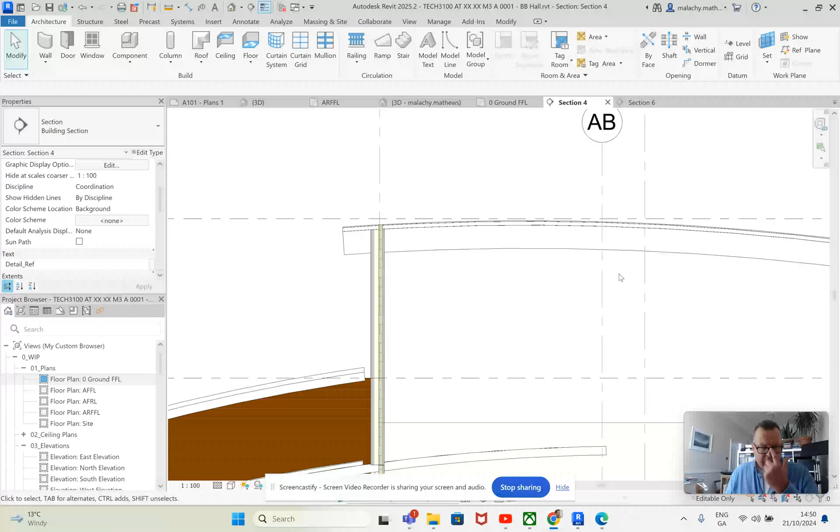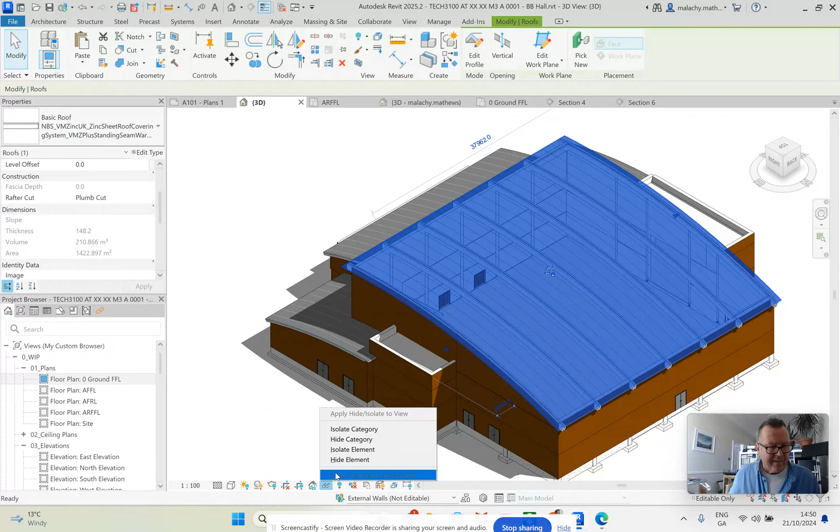Now, one of the things that I have to do with our basketball arena here is get in our secondary support system across here. So they'll be like the Z purlins running across that idea. So I'm going to hide this for starters. Now I get access to that.

I'm going to select the walls here as well, and select all instances in the entire project. I'm going to hide those too. So I just got exposed my structure here. Now this is a little technique I'm going to show you here, and it is a variation on a technique that I picked up from Niall at the 8020 BIM channel, and Jeff at the Revit Kid as well. So a little variation on stuff that I've learned from them.

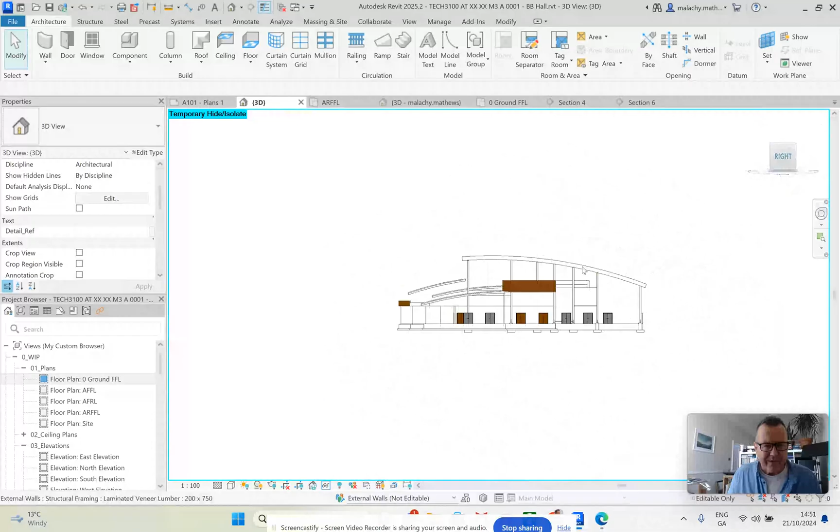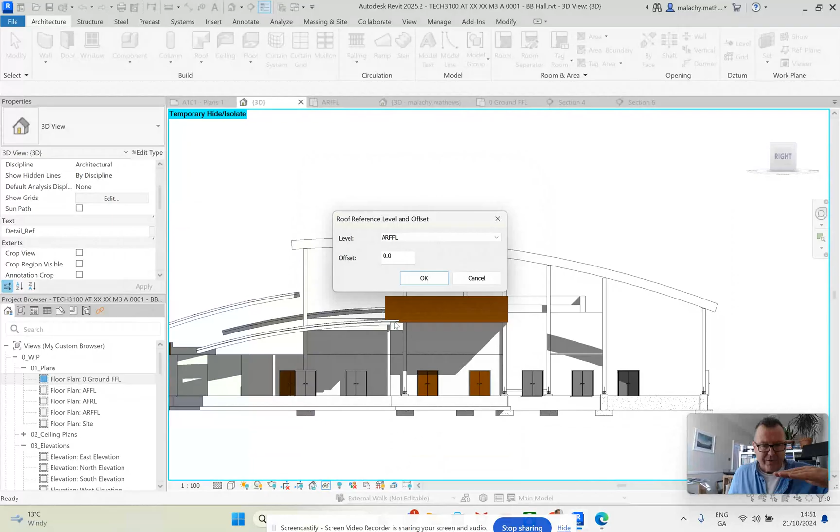So let's go over to here and to the right hand side so I get a vertical view here. Now, in the same way that we created the curved roof, we're going to do a second version of that. So this is going to be roof by extrusion. We still have our reference plane picked there, so we've gone from horizontal to vertical now modeling, and we're going to pick our wall like so. Now here's our roof over here.

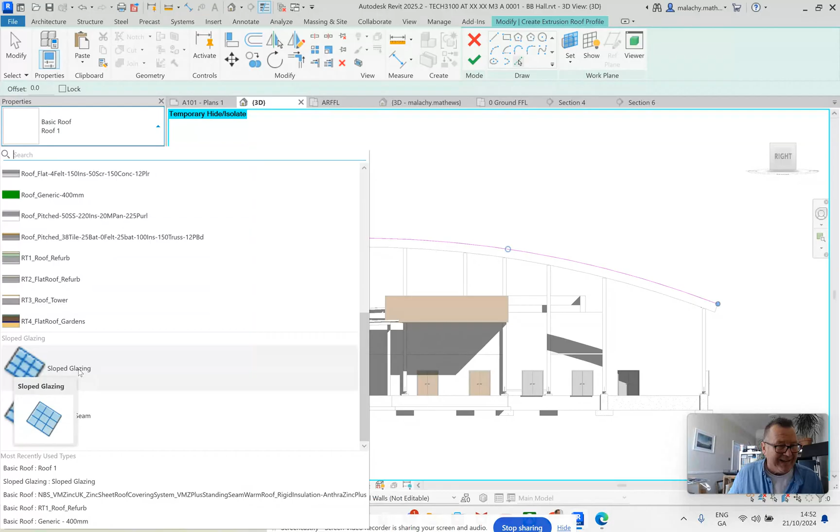So we can pick any of these, but you're going to pick what is called a sloped glazing. All right, so we don't need to pick a roof, we're just going to pick sloped glazing for the moment, and then we're going to go into the properties of this here. So you want to pick empty panel here as well. Okay, so that's an empty panel, and grid 1 is either north-south, or grid 2 is east-west. One of them, you might have to just figure that one out.

What I'm going to do is just put in fixed distance. I want an 1800 distance in between where my secondary structure is going to go. Now, for the grid 1 mullion type, right? So I'm only putting in one set of mullions, it'll either run on grid 1 or grid 2. As soon as I complete it, I'll know exactly where I am on that. And if I hit the drop down box here, you'll see that I have a variety of mullions.

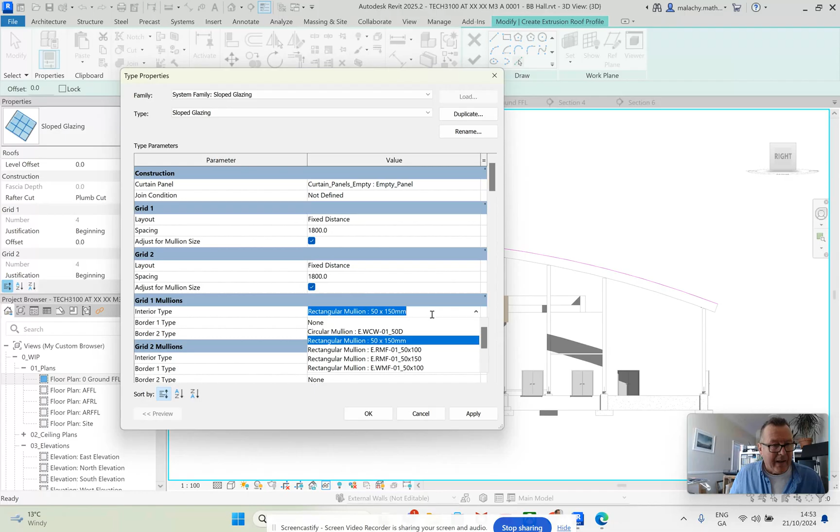All right, now you're immediately saying to me, okay, but they're not the right size, and they're not the right material and things like that. And you'd be right. So part B is going to show you how I get a custom mullion, if you like, into position. But I'm just going to complete this here for the moment, and I'll go OK, and I'll just go to 3D. Open to an ISO view before I finish this.

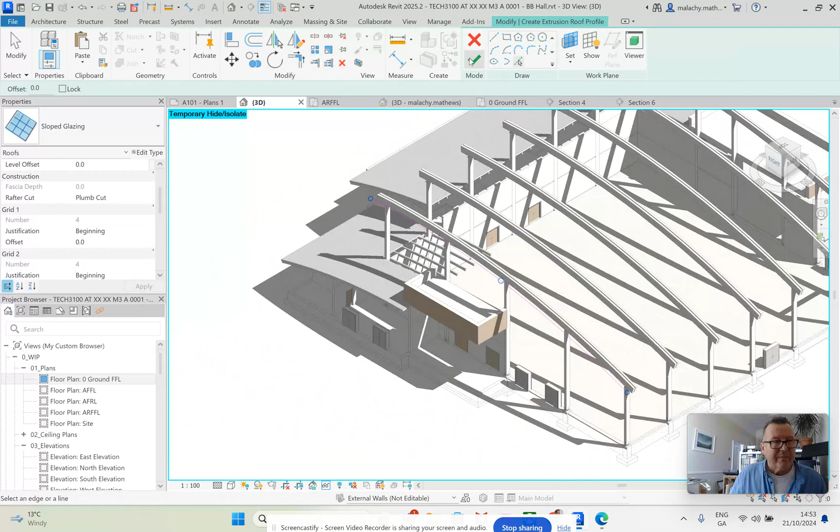Right now, you can see that it's gone and created a roof, and they're running the correct distance there. But obviously that's a 150 by 50 mullion, probably an aluminium mullion there. Now the nice thing about this as well is that because it's a roof and has grips, I can pull those in between the first and the second. So we pull these right over here. And again, there's a fair bit of computing power going into doing this. Okay, and I could probably do this up here, it might be easier.

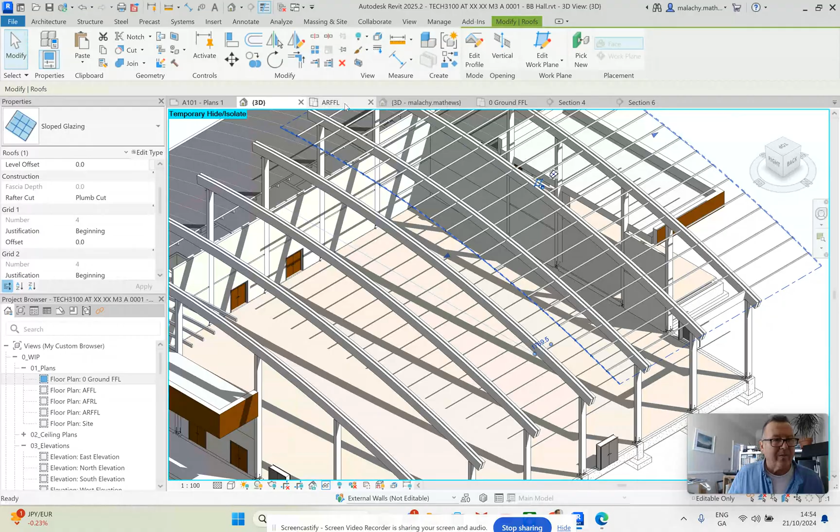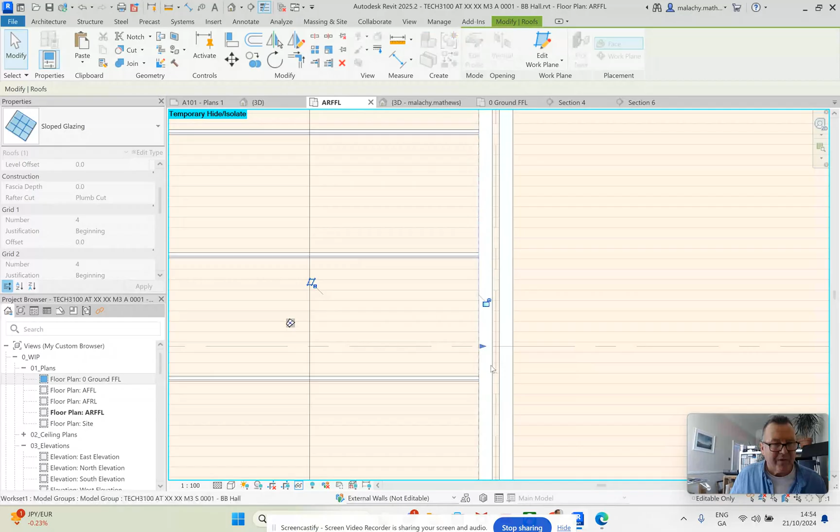Yeah, so right, I'm going to pull it as far as the edge there, and as far as the edge here. Now what I'm showing you here is that rather than having it run through, I'll run to there. Once I get this one right, I can copy them across like so. So let's go back into 3D there. Now you can see that's how I want to arrange my intermediate supports.

So how do we get the size and the material that I'm looking for in? Well, we've got to create a mullion profile. So we're going to File, New Family, and it's Metric Curtain. Let's see. A mullion profile.

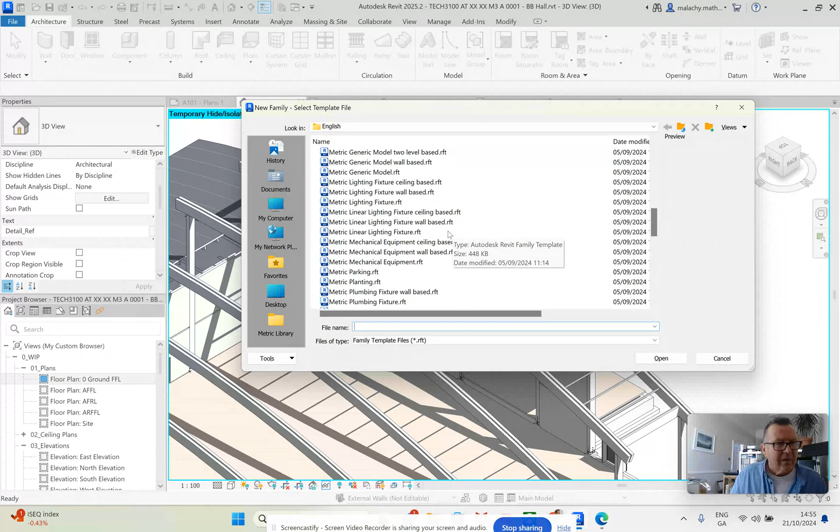So I have to find the right template to use. Yeah, here it is. Here, profile mullion. And we'll open it from there. Now we've got center of mullion, the interior, the exterior. Not too worried about that in our case for this one. All right. Curtain wall panels are trimmed to where the profile sketch intersects in the front and back plane here.

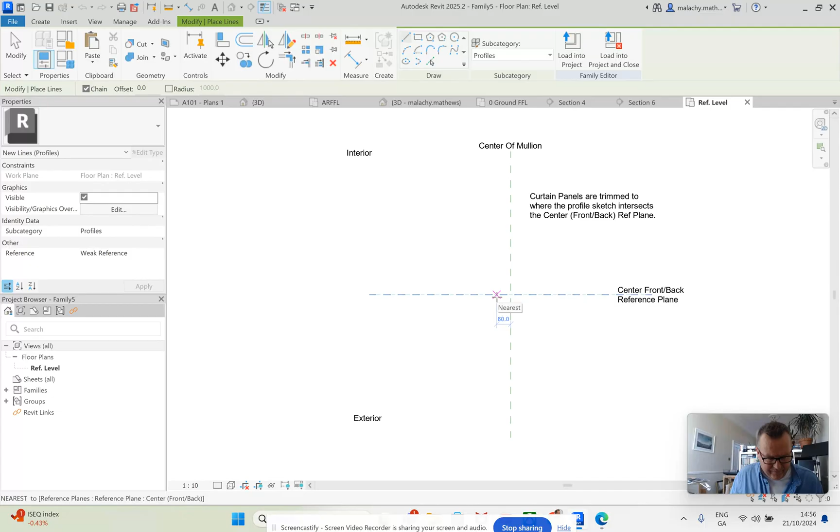All right. So we want to draw a line here, and so if I come out 50, zoom in, right, and we'll come out 50. And these could be 250 or something like that. So I'll go up 125, and then across 100 here, wasn't it? Yeah, and down to 50.

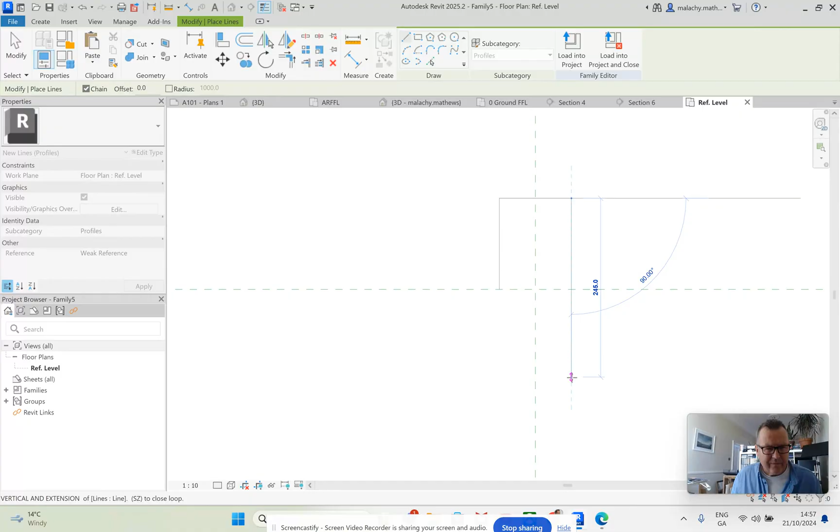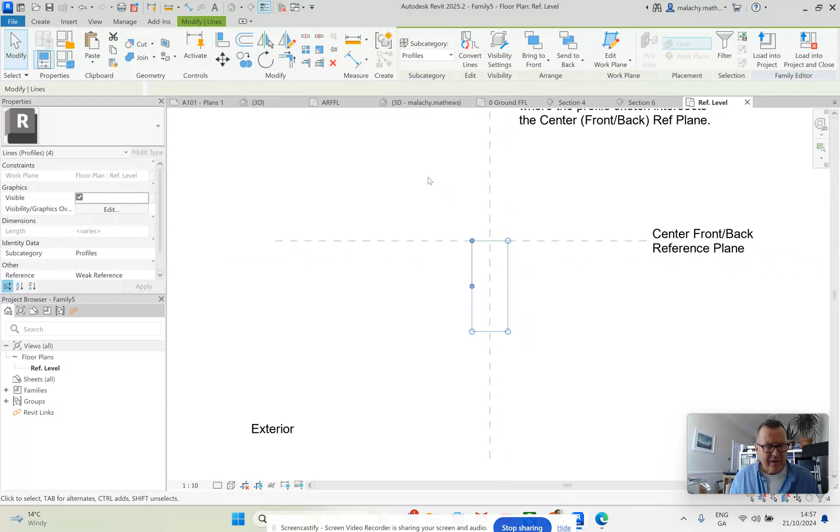And then complete it. Now that's generally the intersection point here, so I'm going to take the lines and I'm going to move them. So these are the profile lines. I'm going to move them down here because I want this to come up at the top of our curved beam. Now, not 100% sure if this is going to work or not, but we're going to try that and see. So it's going to be a mullion.

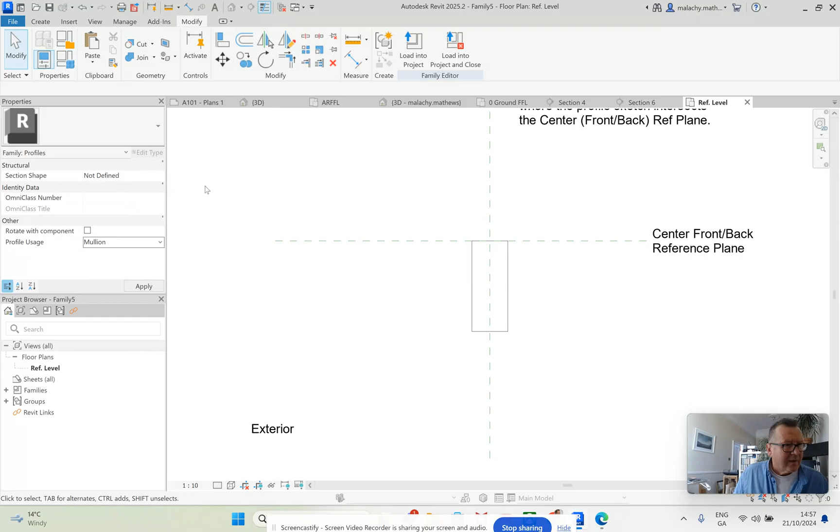Let's see what choices have we got here. Mullion, reveal, slab edge, gutter, fascia, stair nosing, wall sweep, and whatever. So various. We'll just leave it at mullion for the moment. So I will go file, save as a family. Now I'll put it into my families folder here, and I'm going to call this laminated secondary. Laminated secondary. Save. Okay, let's load it into the project.

Now let's get the 3D back up. Let's pick the beam system. Or sorry, it's the slope glazing I wanted to pick, and edit that. And let's see if we can swap this out for... now there's an extra step here, I do believe. It's in the project, but I don't think it's in the correct location, so bear with me.

Now there's a little trick to get that custom mullion that we created. It's in the project, but it's not part of the mullion setup, if you know what I mean. So I need to come down to families down here, and curtain wall mullions, there it is. Okay, now I'm going to create a new one. Rectangular mullion, new type. Okay, and we'll call this one secondary.

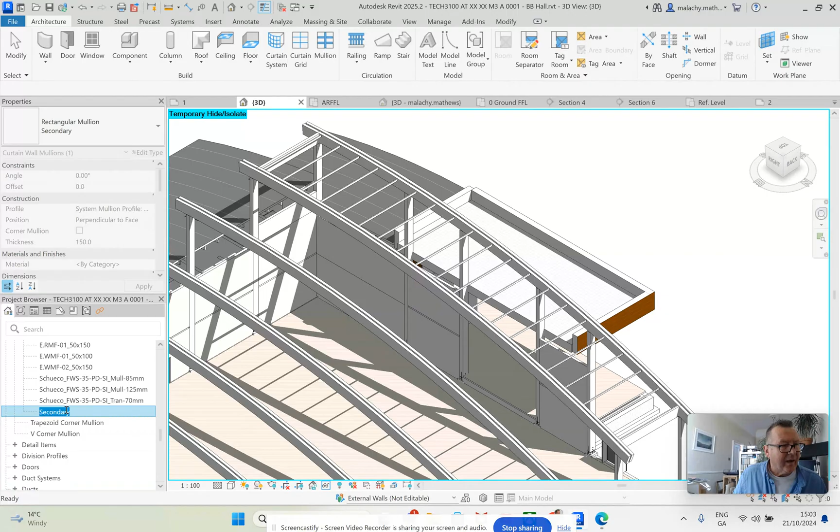Okay, secondary. All right. Now with the secondary, we are going to go in, select that one, and type properties. Okay, now I should have access to all the profiles here now. So what do we call this?

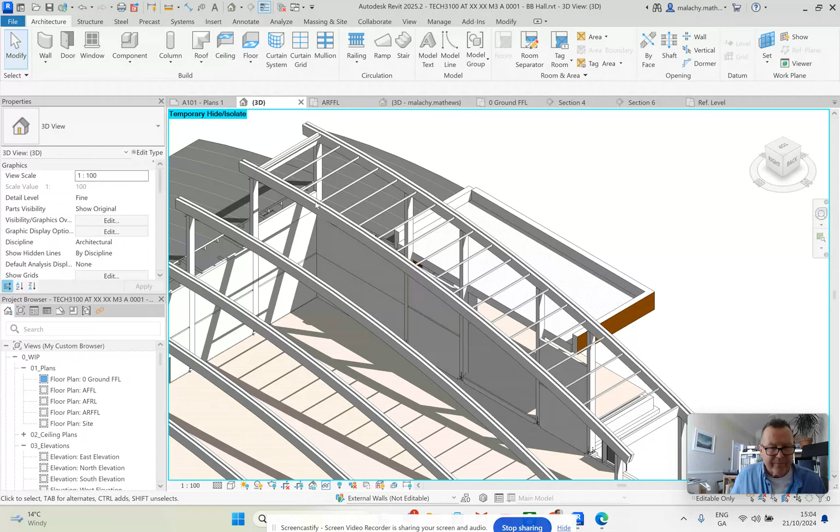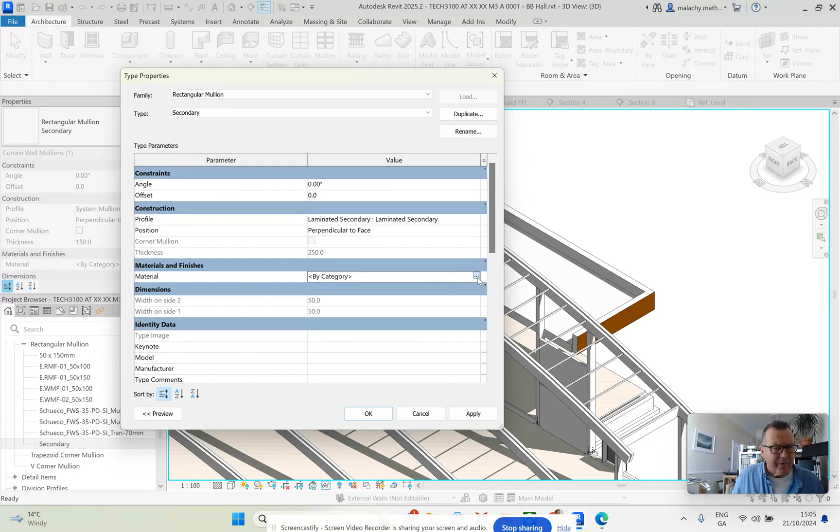Okay, I had loaded it into the wrong project. So I'm back down here now into my families here, secondary, right click and type properties, the drop down box, and what we should have then is laminated secondary. Okay, now we even get to put a material on it here, which is great. So this would be our HBA glulam.

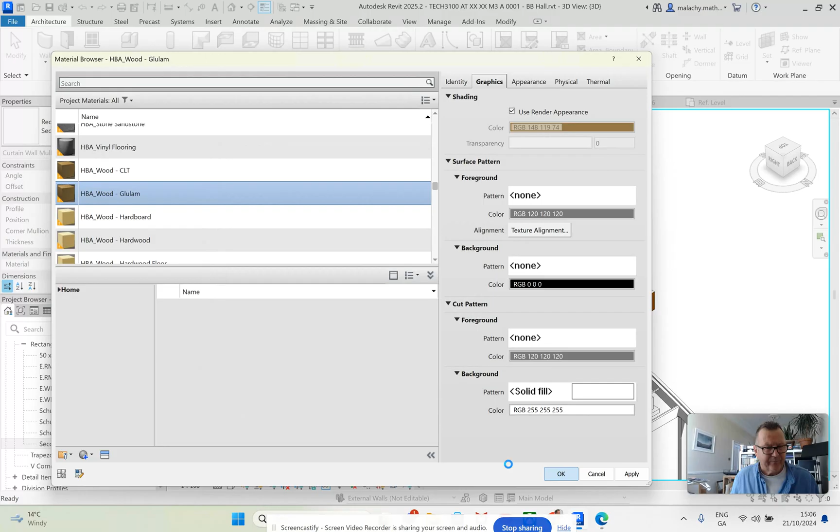Okay, I just want to go back into that for a second here. The background here, I'm doing a solid, and I'm just going to make it white. Okay. Okay, so we brought it in. Now we have to get it into the mullion sphere, if you like.

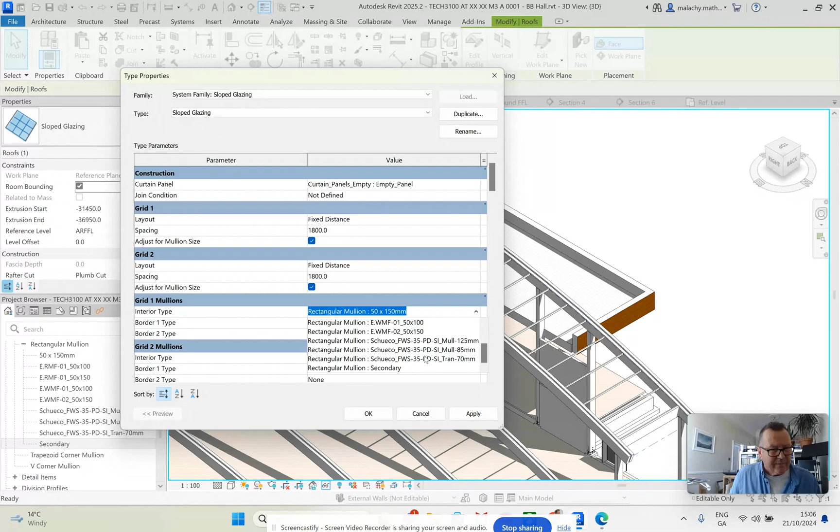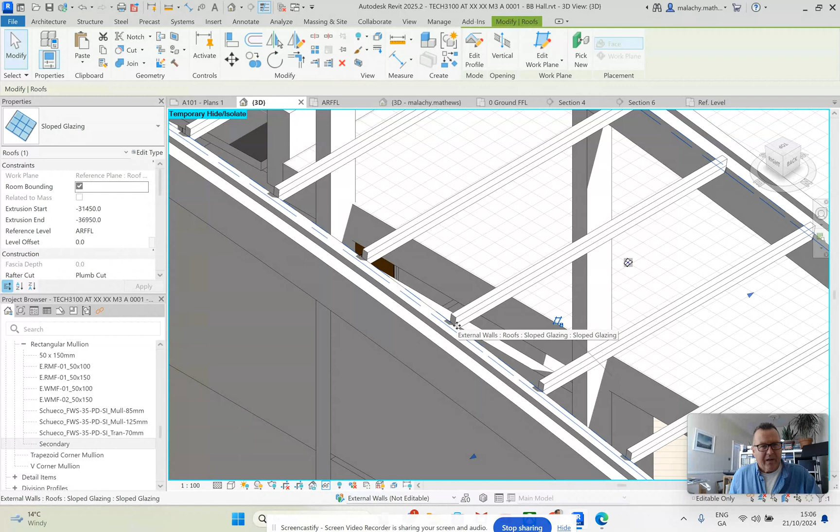So let's get hold of the sloping roof back over here now, and now we should be able to pick secondary, there it is. So, okay, and it'll update. Right, now there you go. So that is the process. Still not correct, look, because we're up above here, even though I did kind of bring it down. So I need to go in and perhaps rework that to get that to drop down.

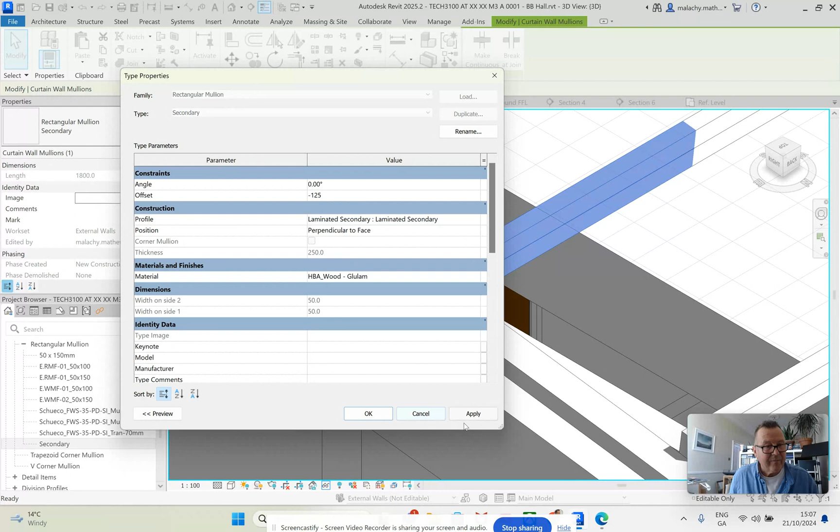I'm just going to tab it here, select it. No, I think it has a type within that. So the width is fine, the thickness is that, perpendicular to face, yeah, that's correct. There's an offset here of -125. Okay, and it could be a little bit more than that. Let's try that again, 150 maybe. Now that's brought them all down, which is brilliant. Yeah, that's great, because that was a type property, so it applies to everything there.

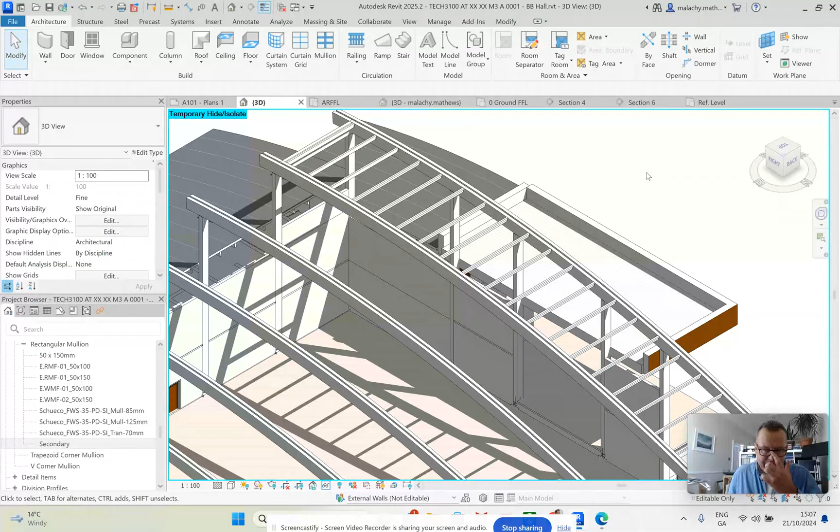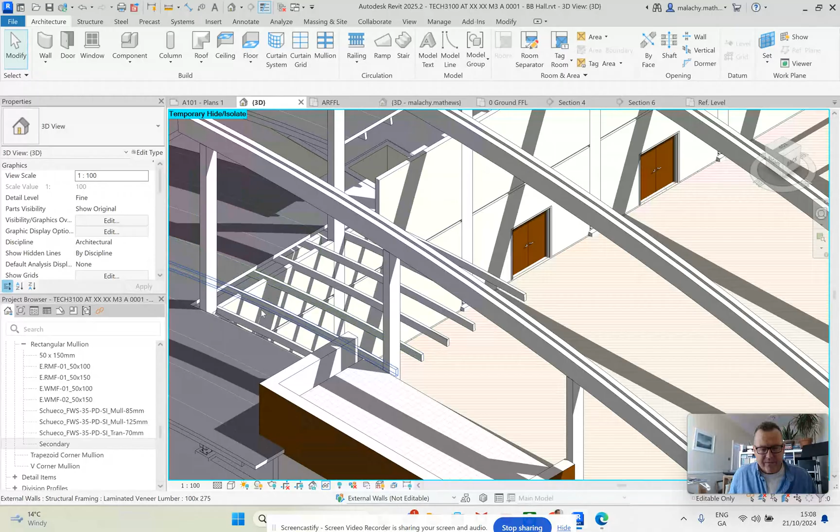Now, once I've got that done, I can copy those across, and that is my secondary structure done for the main arena there. You can see that I put in some curved beams here, so I need to go in and adjust those, but if you're going to run a secondary through those as well, it'll be the same kind of process. All right.